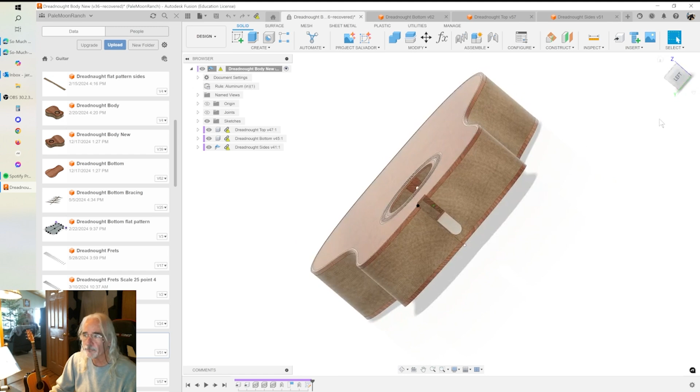One of my subscribers brought to my attention that the top and the bottom of the body on the acoustic guitar, when we use the thicken command to extrude to create a solid body from the surface, didn't extrude in a way to line up with the body. The body is perfectly vertical, but because the top and the bottom are at angles, when the thicken command thickened them, it thickened them at that angle, and the result is this.

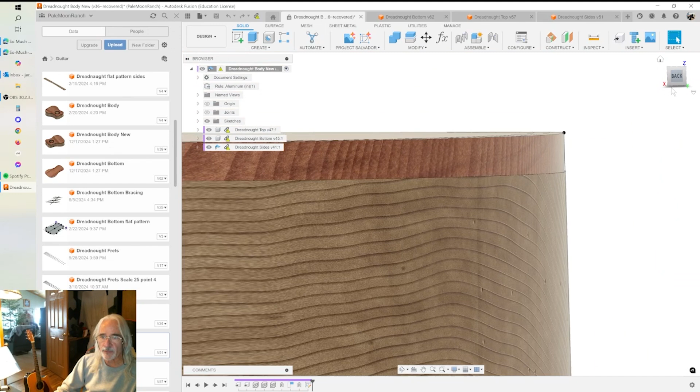I'll zoom in so you can see. I drew a line here. I made a sketch and drew a line to demonstrate. Now this effect is very, very small, but it is there. This is about 15 thousandths of an inch, this gap that you see in here. I'll get even closer, but you can see that it is there.

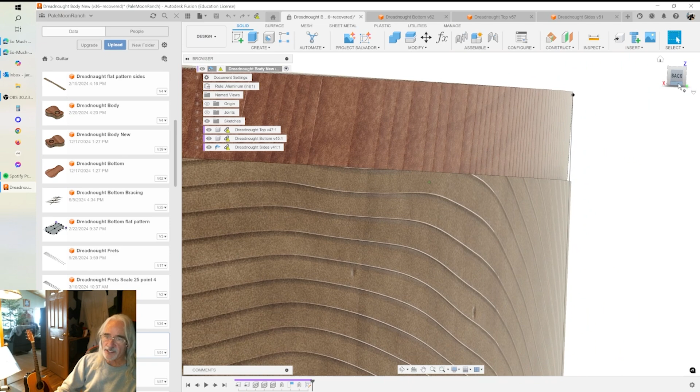In practical terms, would that make a big difference? Probably not. You'd sand that out in about 5 seconds. You're going to be sanding this whole outside anyway, but we're not going to use that as an excuse. We're going to fix this and make it so it fits perfectly.

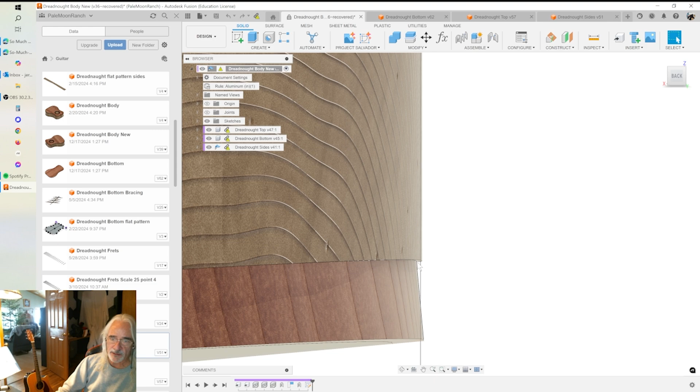It's even more dramatic on the bottom. So let me show you that as well. This is what you get on the bottom. Because the bottom is at a steeper angle, it is extruded at a steeper angle, and you get this kind of goofiness. And this is the top that is 15 thousandths. So with that said, let's go fix it.

It involves having to modify the top and the bottom models, and then adapting the sides to those new tops and bottoms. So we'll get started with the top first.

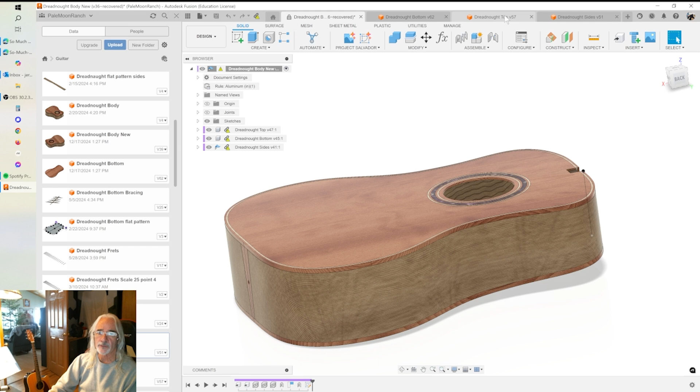So this is going to be an addendum to parts 5, 6, and 7, which are creating the top, the bottom, and the sides and the body. At a later date, I'm going to create new part 5, 6, and 7 videos independently. But for now, this is an addendum that is going to start from where we make the changes in each one of these models, and just cover the new functionality that will fix this issue.

So starting with the top, if we go along our timeline here, down here there's a surface delete face command on the timeline. We are going to start from there.

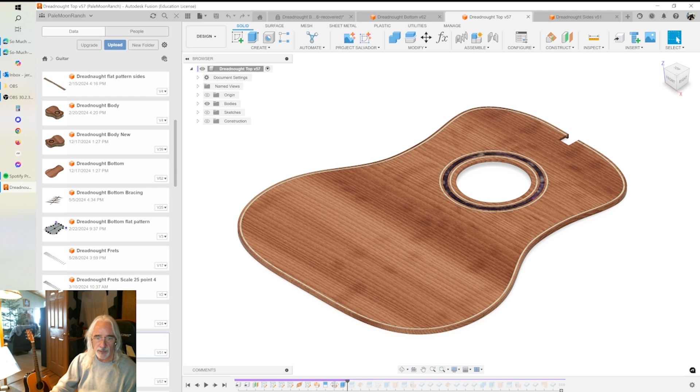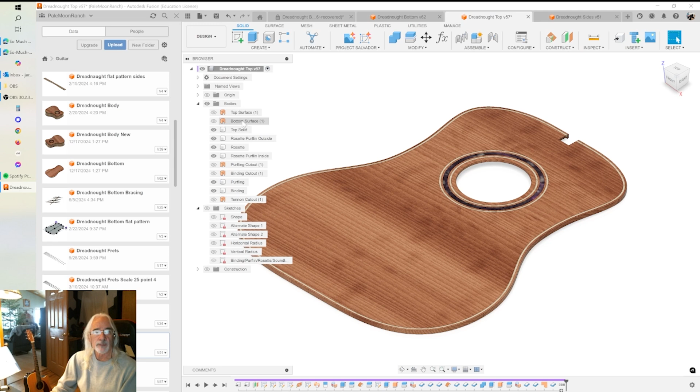As a note, before I do that, let's move the timeline back out here. And I just want to say that while I was in here, I did a few things too. So you're going to see some differences here. I deleted sketch 9, which was an unnecessary file, it didn't serve a purpose. So you'll see that there is no sketch 9, but you'll see all the sketches have been named according to the functionality they provide, as have the bodies. So all of the bodies have an appropriate name for what the body represents.

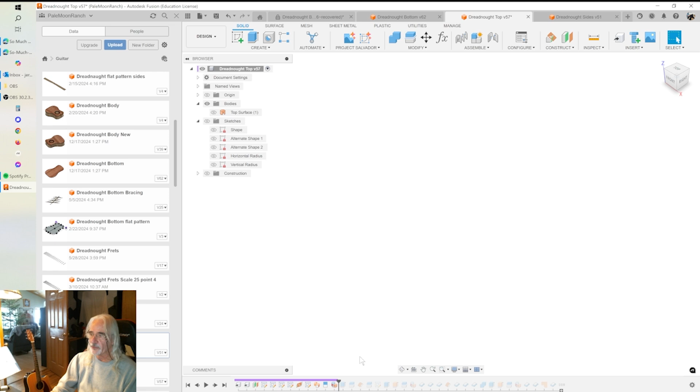So now back to this. First thing that I did was, instead of doing a thicken of the surface body, instead I did an extrude of the shape. So turn off that surface body. I still created the surface body because we're still going to need it to use as a cutting tool, essentially. But instead I did an extrude of the profile from the shapes sketch. I did that in 2 directions, just arbitrarily a half inch in each direction, and created a body to cut from.

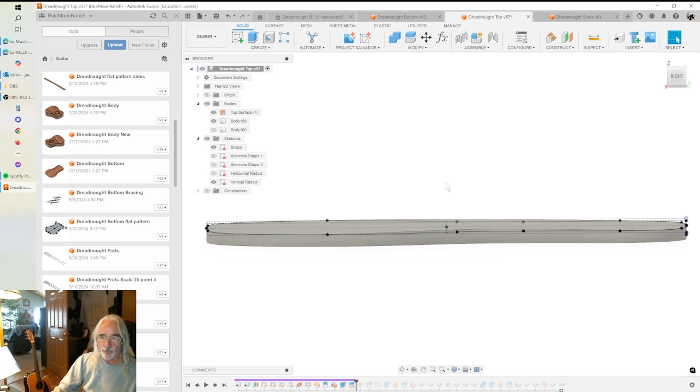So the top is already on a horizontal plane, so it's not as dramatically affected by this as the bottom is, but we're going to redraw it anyway because it is off just a little bit. Because of the radius that we cut into the top, it doesn't end up being a perfectly flat surface.

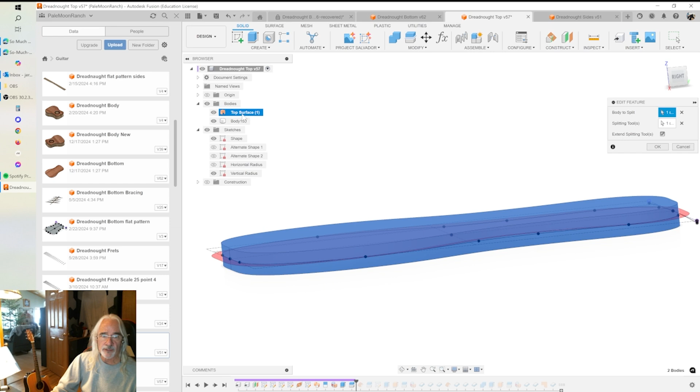So after we extrude this body, then we're going to cut a split body, and our body to split is going to be the extrusion that we created, and the cutting tool will be the top surface that we created with the sweep command.

So once we've cut that, you cut it here, and we'll turn off the body on the top, and then we still have the bottom.

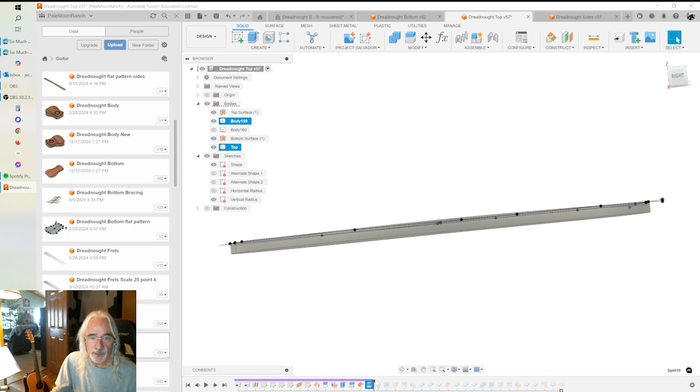So next thing I'm going to do is create an offset from the top surface and create a bottom surface, and then we're going to do a split body on that. And the body to split is going to be the remaining portion of the extrusion, and the splitting tool will be that new bottom surface that we created.

And then when we do that, we can turn off the other part of that body that's left, and what we're left with now is our top.

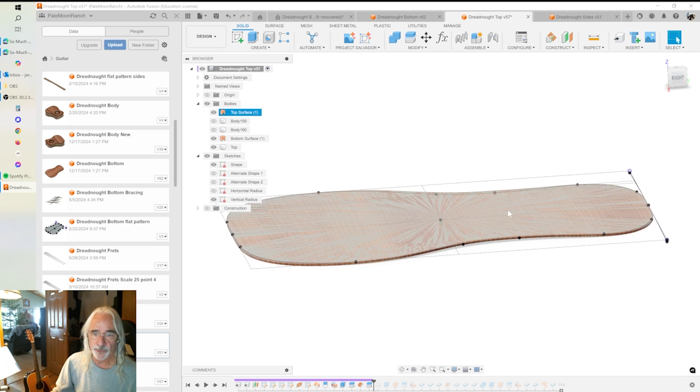So I'm going to turn off these cutting tools for now. We don't need those.

And then I'm going to create a sketch, and I won't go over all of this. This is in the original video of creating all of the drawings for the purflings, the rosette, the sound hole, and the binding.

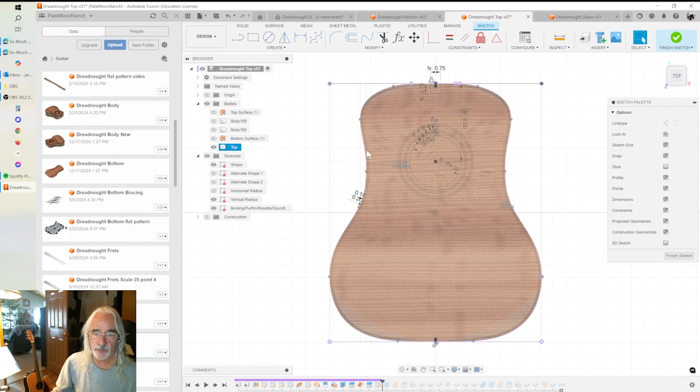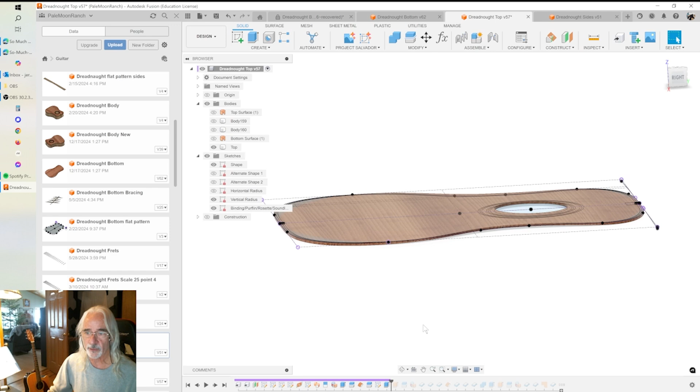Next thing I'm going to do is create the purfling and the binding. Since we didn't do this with surface bodies, it's no longer on that same shape. Now, because we extruded it, these edges are straight up and down. They're no longer at the angle of the radius top. They're just a straight up extrusion from the profile. So these edges are perfectly vertical.

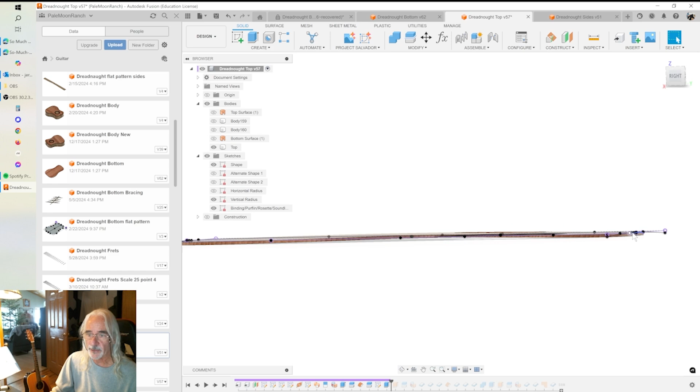So the next thing I do is I created a cut extrusion to cut out the sound hole. And then I created a surface extrusion off of the sketch that we made.

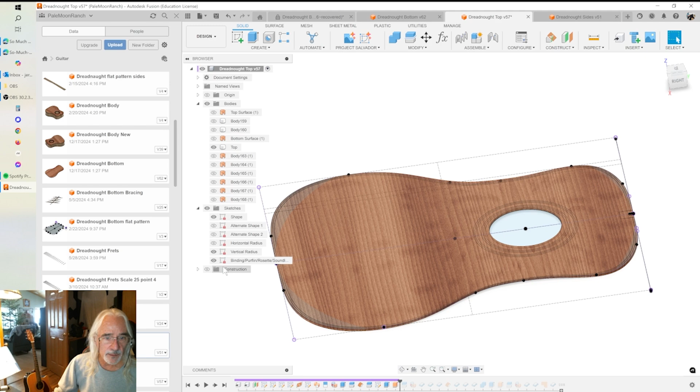Let's turn off these other sketches. We're doing this stuff in here, the purfling and the rosette. So I chose those 6 lines that define the purflin and the rosette, and created surface bodies to use as a cutting tool.

Then I use a split body to cut those, so that now I've created a separate body for each one of those pieces.

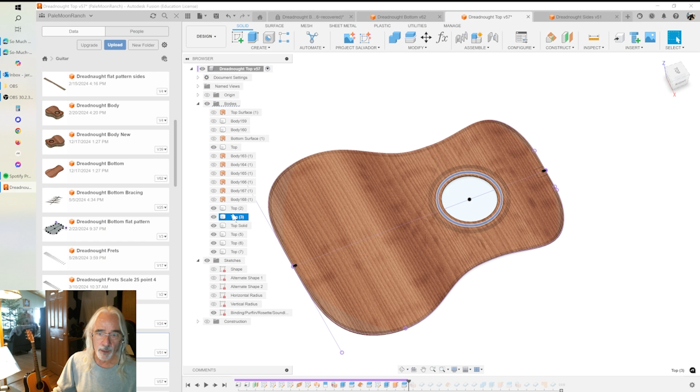Next thing I'm going to do is delete those faces for the rosette and the 2 purflings, and that'll just leave a surface at the bottom of the top. Sounds weird, I suppose.

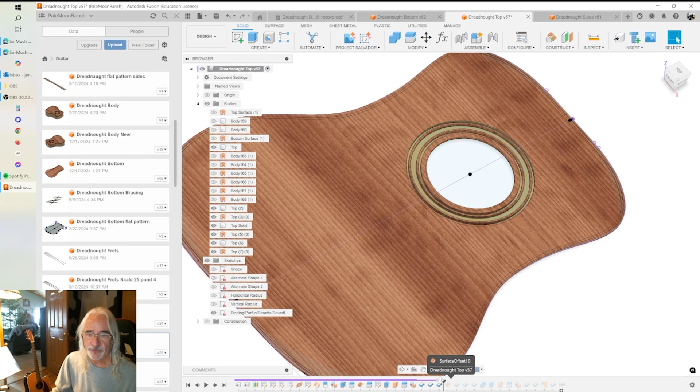Then I'm going to do a thicken on those surfaces to half the thickness of my top. So thickness divided by 2. In this case, it was a minus to get it to extrude in the up position.

Later, I'm going to do a combine to combine those surfaces with the bottom because they are solid, and then that will just leave these holes to which I can now create the purfling and the rosette.

So next, I'm going to create surfaces on top of those bodies. So now I've created surfaces on those bodies.

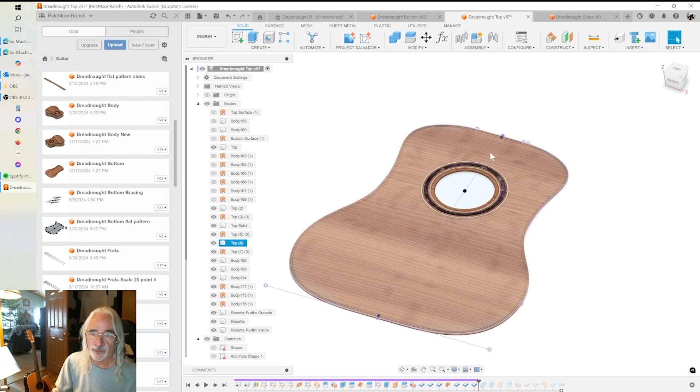1, 2, 3. Let's turn those on. You can see those surfaces, and then I'm going to thicken those surfaces to the top of the top. The wording's getting a little weird here.

Okay, and I've applied appearances to these to show them. But what we now have is 3 bodies there, and then we have 6 bodies underneath.

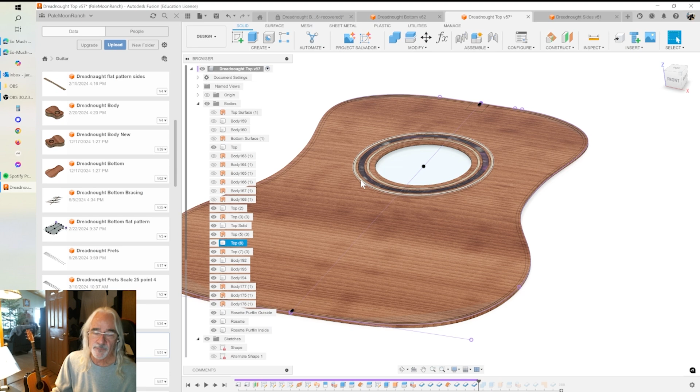So I'm going to take those 6 bodies now, minus these. I'll turn these off, and we're left with this. So I want to combine everything that's here without those purfling into a single body.

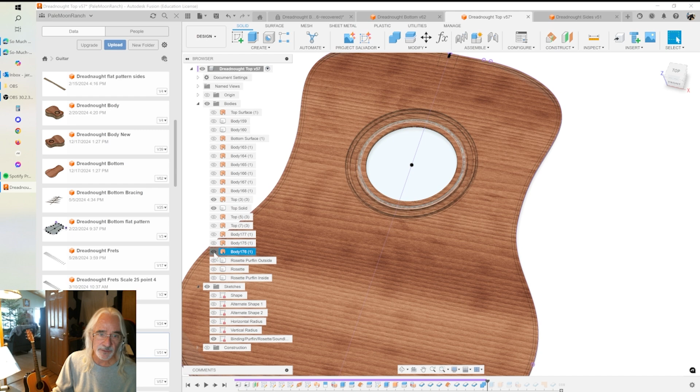So I'm going to do a combine, and that combines all of those. Then I'm going to turn off all of those surfaces and get them out of my sight. And now this is all one solid body, and I can turn back on my rosette and my purflings.

This is all very similar to what we did in the first video, but because of the way we created this with a solid extrude instead of a thicken, they've just changed a bit. So that's why I'm running through all this again.

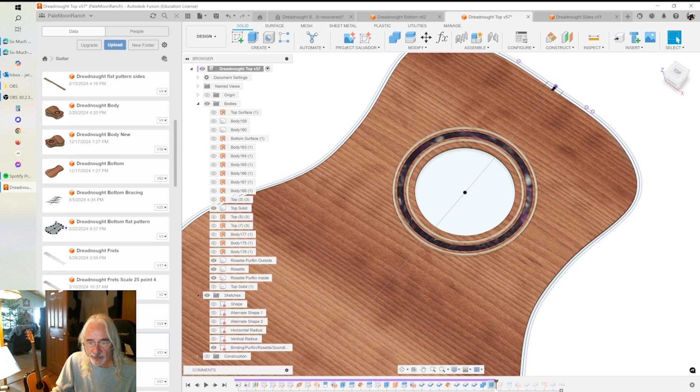So next thing I'm going to do is an extruded cut using my sketch. Let's get my binding sketch. I'm going to turn off the body so you can see what I chose.

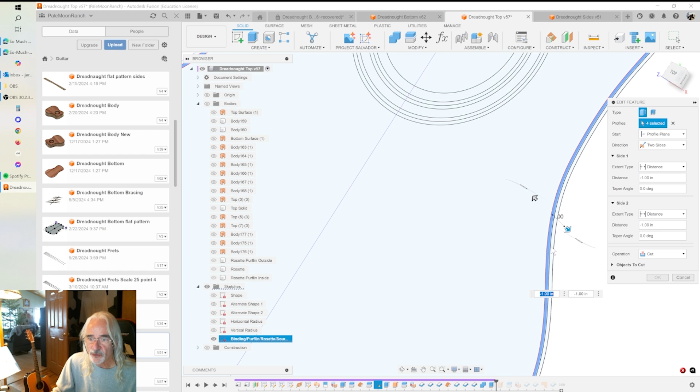So for my cutting tool, I created these. I chose those 2 inside lines from that sketch in order to cut through the body. And so that gave me essentially this.

So what I did was I cut out that strip in between. What I've done is create 2 surface bodies with this surface extrude on the side of the top and the inside of the remaining piece that will become the binding. So hopefully you can see that there's 2 surface bodies on those inside edges.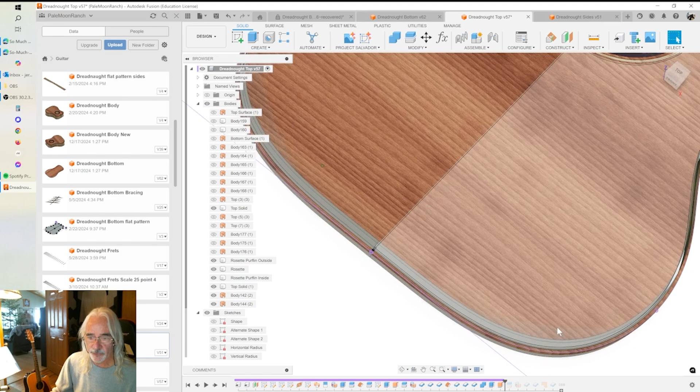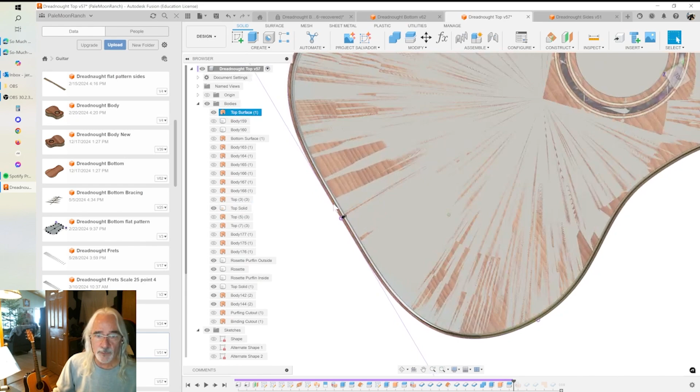So next what I'm going to do is use those to split the top surface. So I'm going to do a split face, and what I did was I split that top surface. Turn off the top solid for a minute so you can see that.

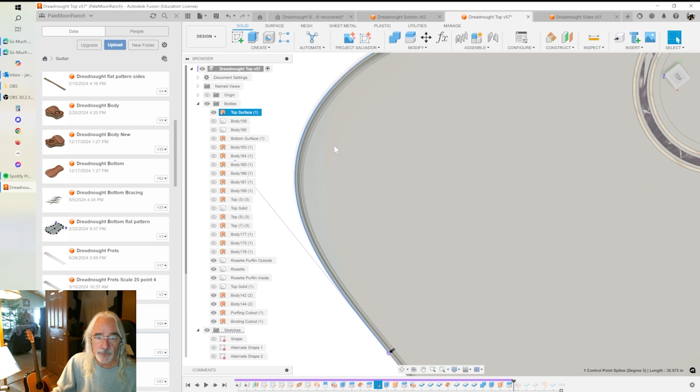So now what I have is 3 surfaces here. There's the one that constitutes the main part of the top, one that constitutes the purfling, and one that constitutes the binding.

Okay, and then I'm going to delete those cutting tools, the ones that were on the inside faces of the top and the binding. So those are gone.

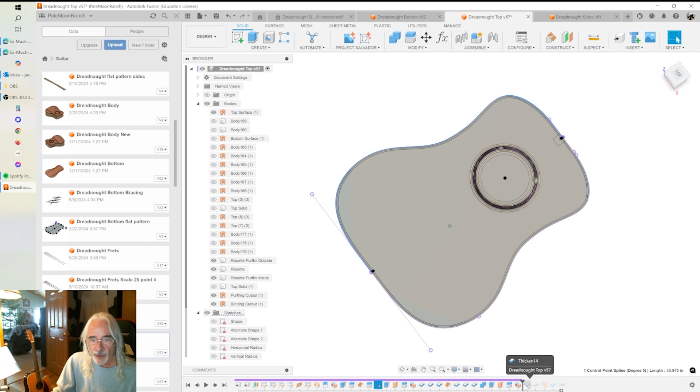And then I'm going to thicken those 2 outside ones. First I'm going to thicken the purfling one, so you can see that I've thickened that to create a purfling, and then I'm going to thicken the outside one to create a binding.

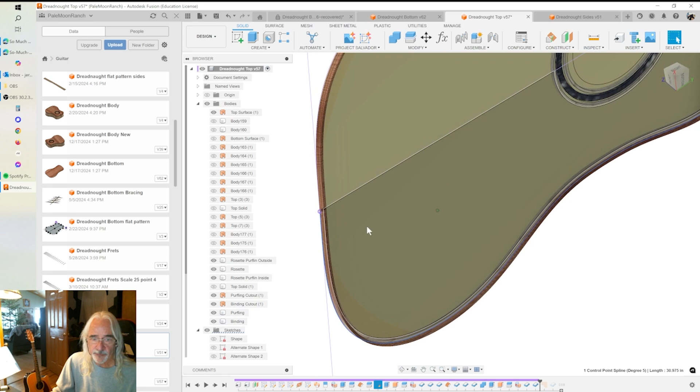The purfling I did to the thickness of my top, and the binding I did to twice the thickness of my top. And that should make sense.

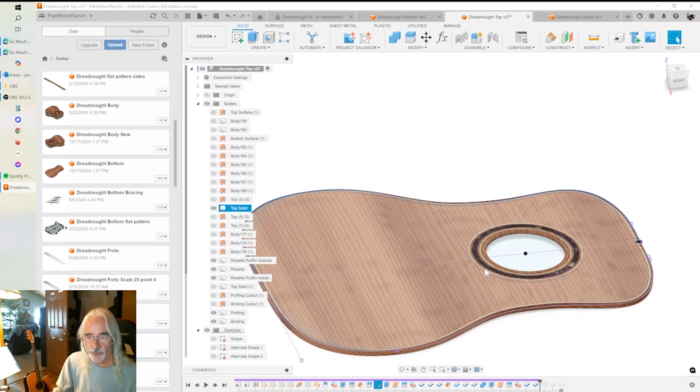So then I'm going to turn off all of those surfaces, and I'm left with - where's my top? There it is. So there's my completed top, except the last thing I have to do is cut out my slot for my tenon from the neck tenon.

So this is exactly the same as it was in the original video. I'm going to create a patch on this sketch.

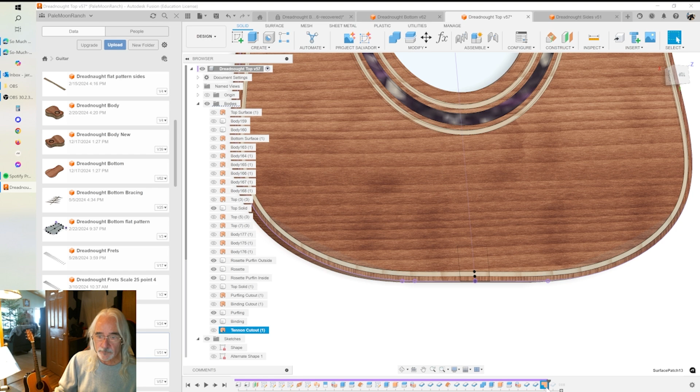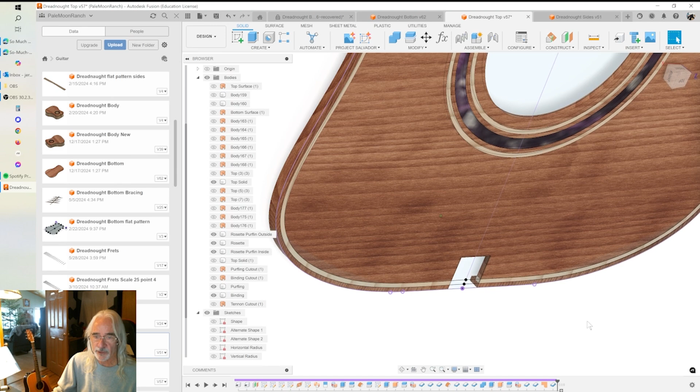So I've created a patch here using that sketch, the binding purfling rosette sound hole sketch. I'm going to use that patch, that surface created from it, to do a thicken cut. I'll use the thicken command as a cut and cut that out. Now we turn off the sketches, and there's our completed top.

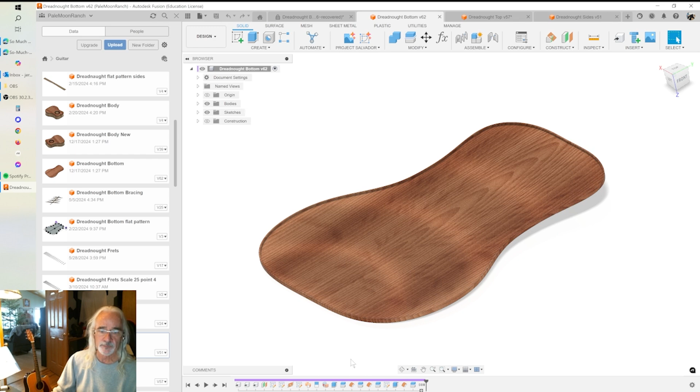So again, we're going to start in the same place where we deleted those excess pieces around the edge of the radius bottom, and just like before, we're going to do an extrude.

Let me back up and notate here again. I did some naming and cleaning up over here. One thing I did was sketch 7 up here was redundant—we already brought in the shape sketch from the top through a derive down here. For whatever reason I projected that onto a new sketch originally, and that was unnecessary. I already had it here; I didn't need to project it.

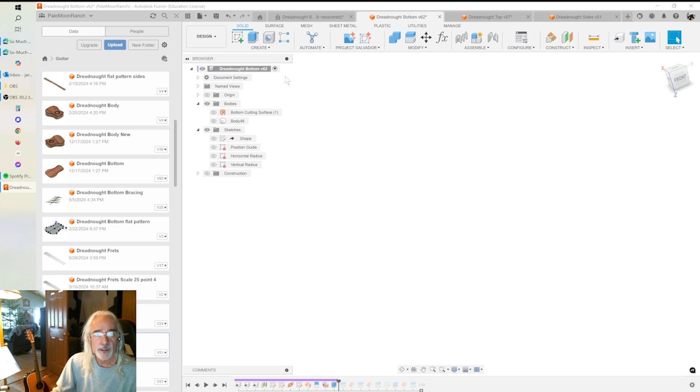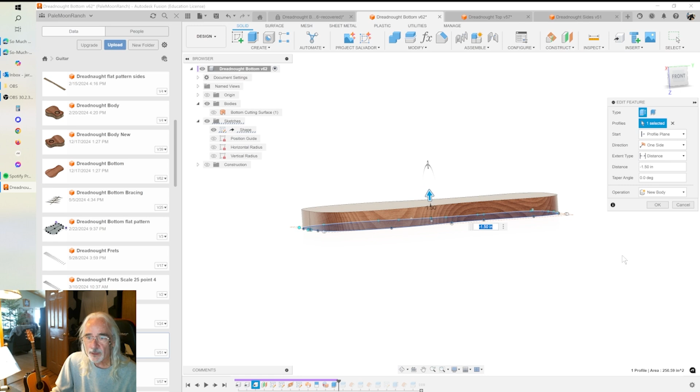I'm only using that in order to extrude this body. So I'm using that shape, that profile, to extrude it and create this body. And if we take a look at that, I just extruded in both directions, and it's in half—never mind, I only extruded in one direction.

That's all I needed to do on this one. So I extruded that up 1.5 inches, and then I did a split body using the bottom cutting tool, the bottom cutting surface, which we created with the sweep command.

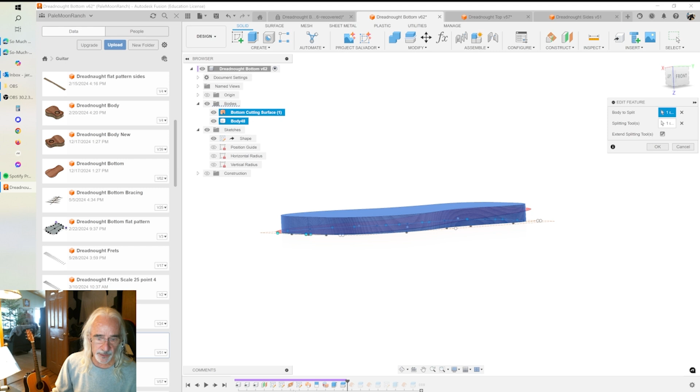So that is the surface we created when we swept the radius surface. I'm going to use that to cut, and then delete that body. So it cut this body in two. I'm going to hide the bottom one—I still have the top one. I'm going to cut that.

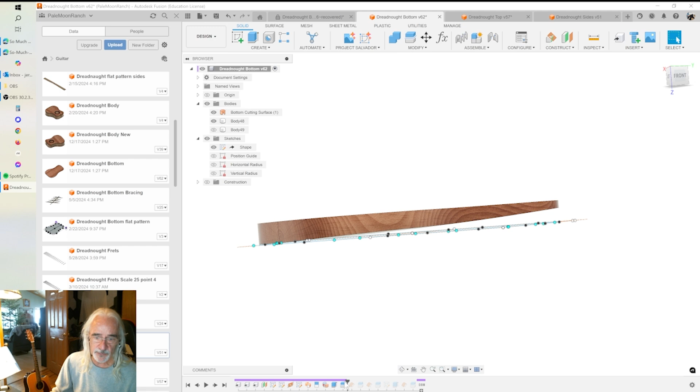So the next thing I'm going to do is create an offset from the bottom cutting surface to create a middle cutting surface, and that'll make sense in a minute. Then I'm going to use that to split, turn off that part, and now I have my radius solid bottom.

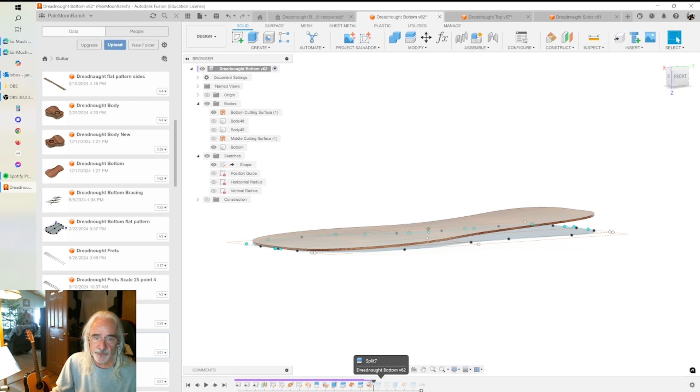So then the next thing I'm going to do is create another offset to create my top cutting surface—I'm sorry, first I'm going to create my binding cutting surface. What I'm doing here is creating an offset from the outside edge of my body.

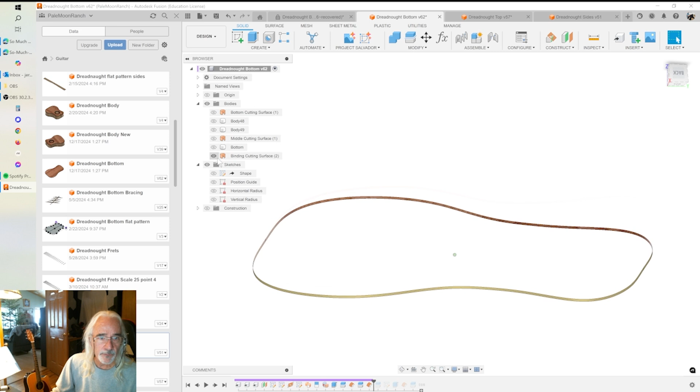So let's turn off that bottom cutting surface and turn on our bottom, and then I'm going to create an offset from this outside edge. I'll get it open here, and I'm going to take that in 1/10 of an inch, the width of my binding. And so now I have that, which I'm calling my binding cutting surface.

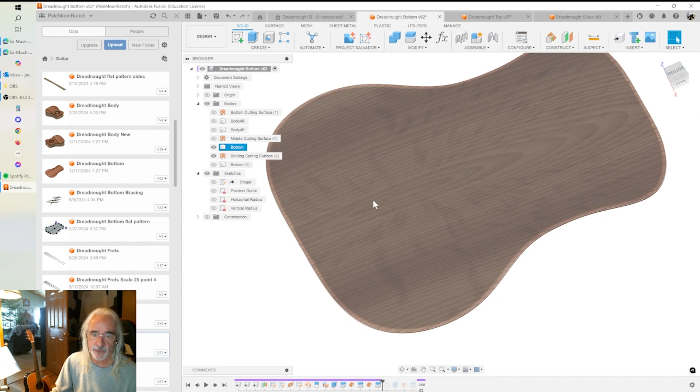So I'm going to do a split body using that tool, and that'll cut away this outside edge so now I'll create a binding in that space instead. I'll turn off that cutting tool, get back to my bottom, and the piece I cut away is that right there.

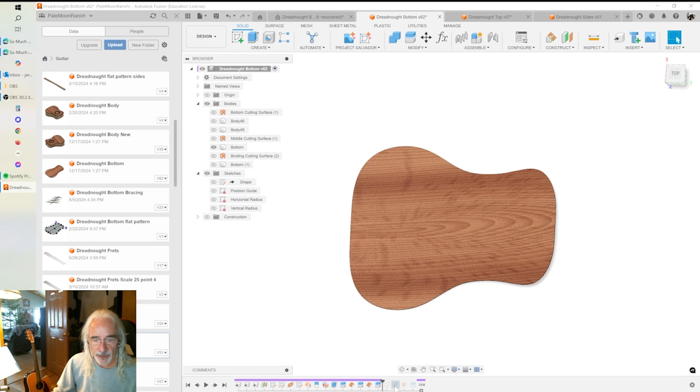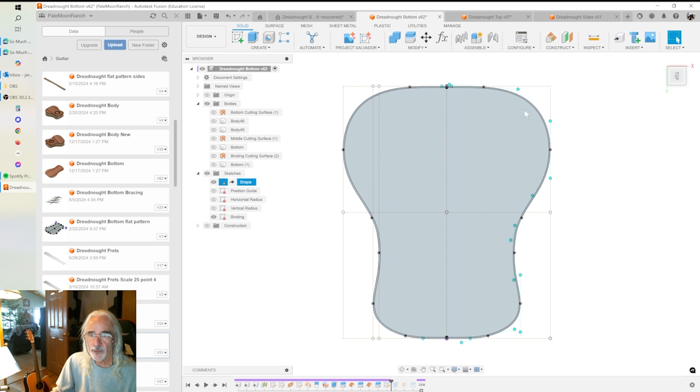So that's gone, and now I'm going to create a sketch for my binding, which is just an offset from the dreadnought shape from the shape sketch. I projected that in and then did an offset inside for 1/10 of an inch, which gives me this profile that I can extrude to make my binding.

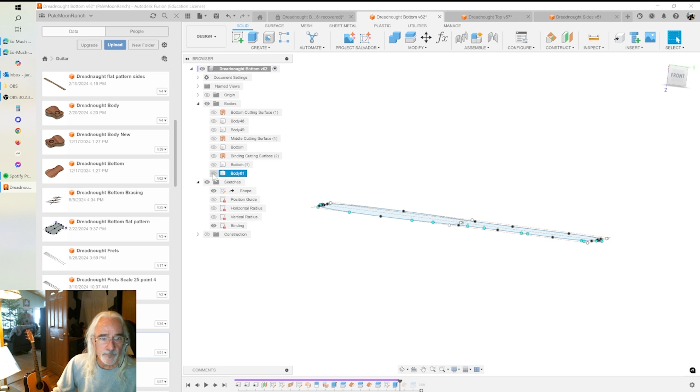So I'm going to do a solid extrude—that's the wrong one, here, yeah. I did a solid extrude again for 1.5 inches up, and now, just like I cut the top, I'm going to cut the binding in the same way.

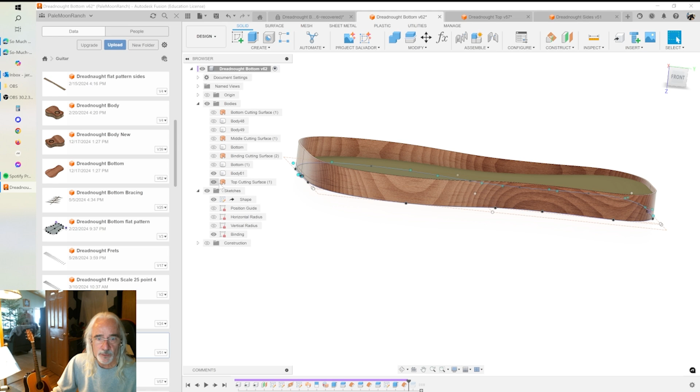So now I'm going to do an offset to create my top cutting surface—so that's this one, and that's twice the thickness because my binding is twice as thick as my top. And I'll have my bottom cutting surface down here, so on the bottom and on the top.

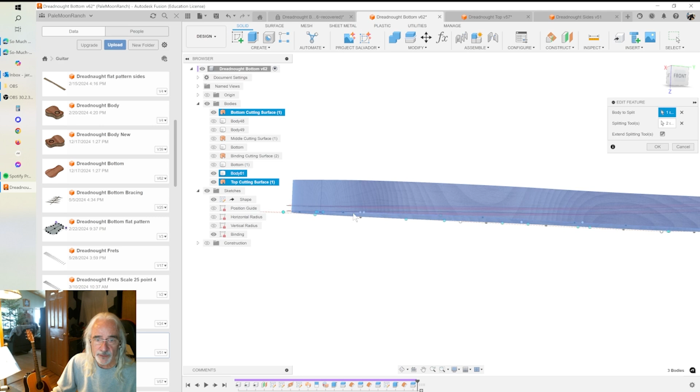And then we're going to do a split body command, which will use both of those surfaces to cut the binding. Then we'll turn off those excess bodies, and we're left with—and turn off the cutting tools—and so there's our binding.

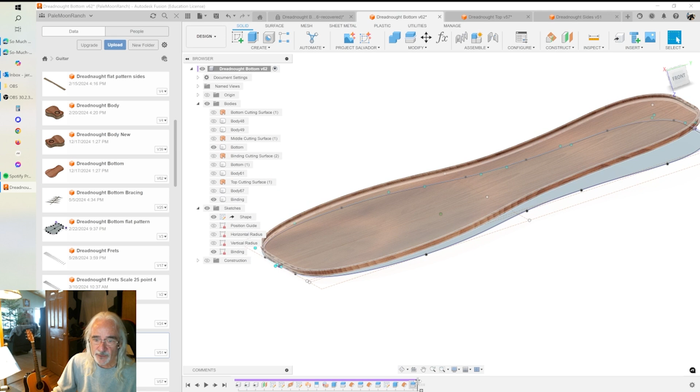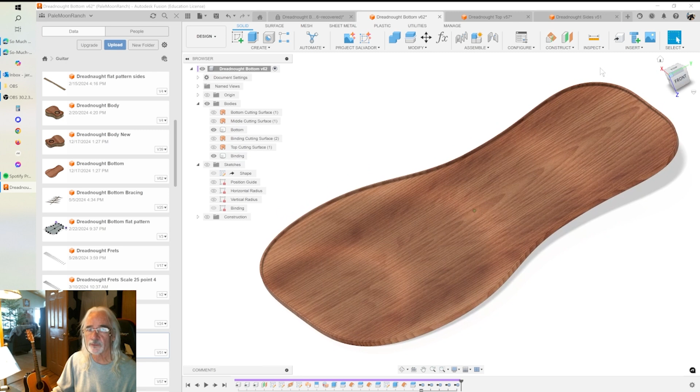Then we can go turn back on our bottom, and that's our completed bottom. The last thing I did here, which I didn't mention in the top video either, is this last little group—I went through and did a remove command on any bodies that were just extraneous so they weren't in the model. And that's the bottom, so let's move on to the sides now.

For the sides, we only have a couple things we need to do. Since I was already in here, I went ahead and did something I didn't do in the original video, and that is named all of my bodies and named all of my sketches.

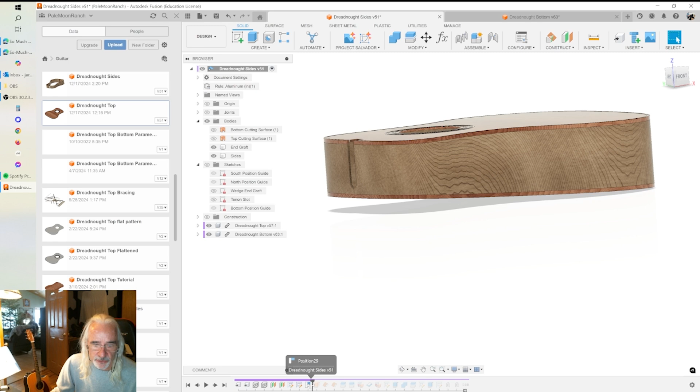The main thing in here is that we'll need to realign things because we changed everything. These will no longer be in the same position they were. So what you need to do is back the timeline up to before the extrude and before that position command, and then position these the same way that we did before.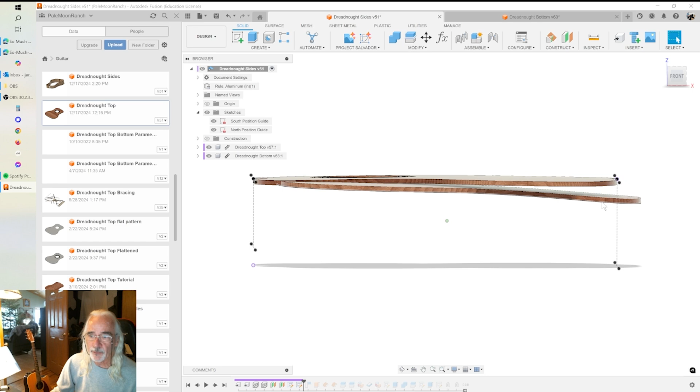So we need to turn on the two sketches for our position guides. The top one is already going to come in. If not, you'll have to position it, but it should already come in lined up with those two points on each end, the north and south position points. And then for the bottom, at least on mine, it comes in upside down.

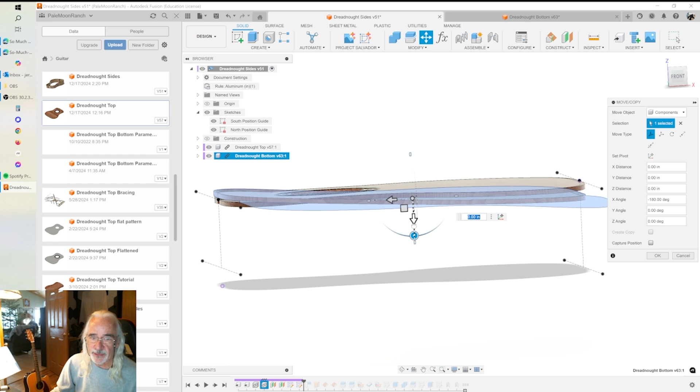So I'm going to do a move. I'm going to choose components, select the bottom, and rotate it 180 degrees to get it right side up. And I'm going to drag it down and do a point-to-point move, selecting the bottom point here on the bottom edge of it, and line that up with the point on the position guide.

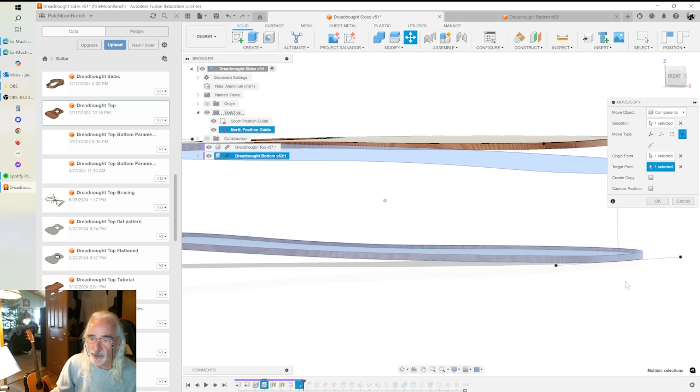Both sides should line up automatically because we set it up that way. When we drew the bottom, we made sure we created it at this angle already, and these position guides here show that it is lined up properly.

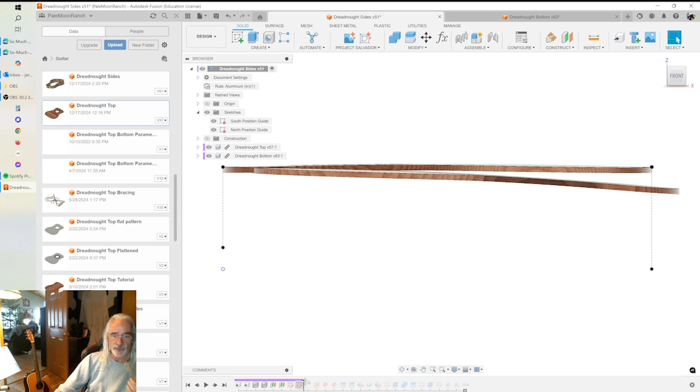Once that's done, you need to step back through the timeline. Actually, after you've done that, you'll want to do a new capture. So if you had a capture on your timeline, delete it, and then once you've positioned those, you're going to capture that position up here on your timeline.

When you do that move command, you'll have a... let me just back up and show that. So I'm going to go through the whole move thing again. We'll get the move command, do a free move, select components.

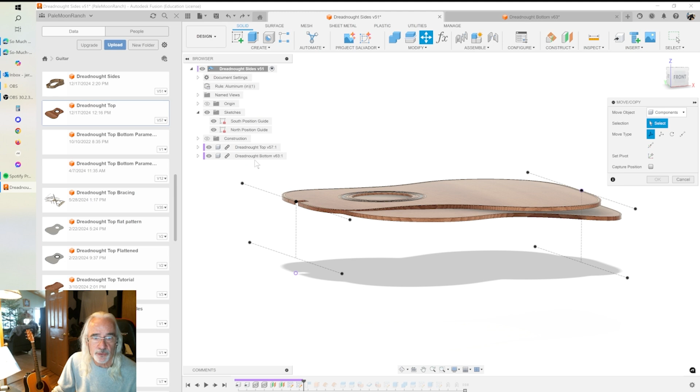We're going to choose the dreadnought bottom, rotate it 180 degrees to get it right side up. Oops, what am I doing here? I'm going to drag it down below.

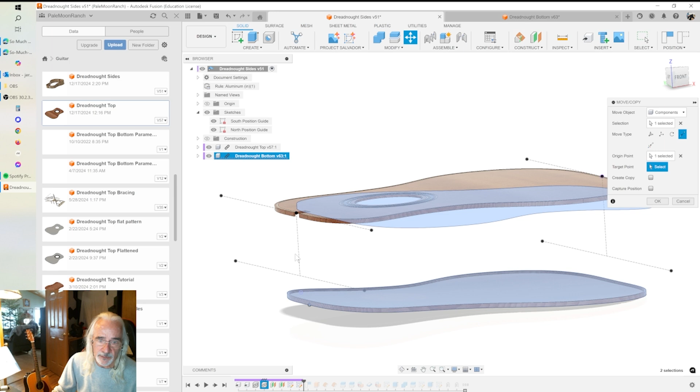Then I'm going to go to a point-to-point move and move that bottom point on the end to there. And if I rotate this around to make sure everything is lined up right, this vertical line should be right on the center, and it should be lined up with the bottom, and that looks good.

I click OK. Now I have a capture position icon up here on my menu. I want to choose that and capture my position.

After that, we're just going to step through each of these. You have to back the timeline up so that it recalculates this, and step through them.

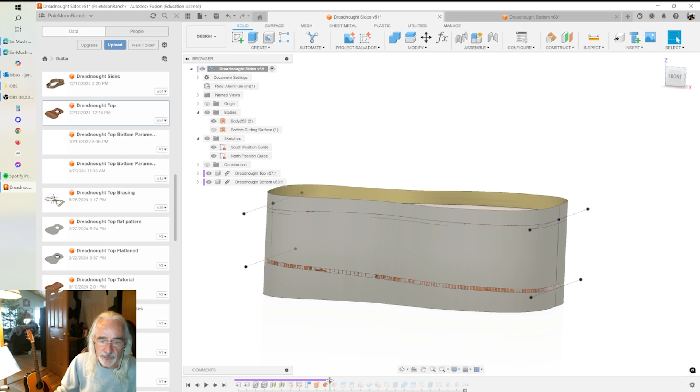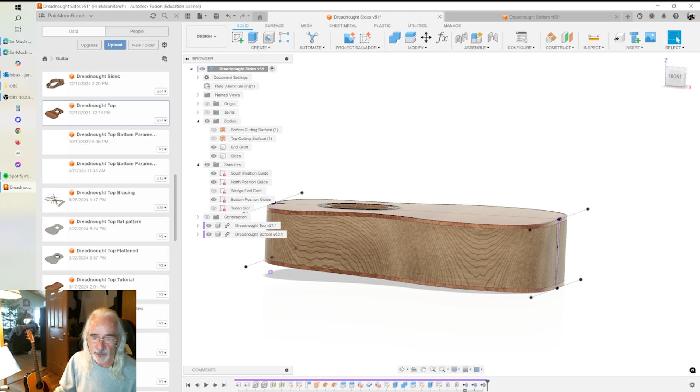Nothing needs to change from the original model. We're just going to step down through to the end. And here again, I added a little group at the end that deletes any extraneous bodies up here, so they're not cluttering up my browser tree. And I put them in a group so I can minimize them.

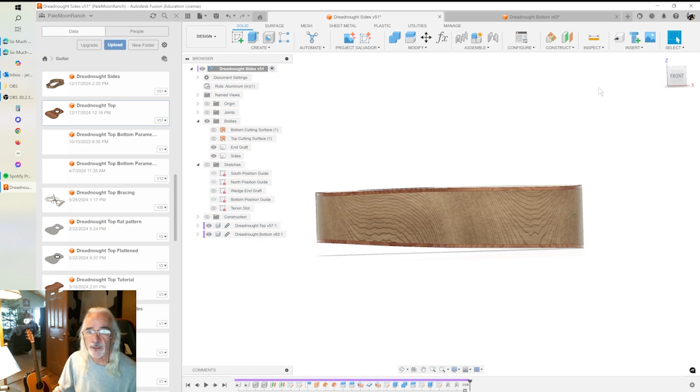But now, if we look at this, let's turn off those sketches, zoom in here, look at the front, and we have a perfectly straight line up and down here now. So that should take care of the problem.

As for the body component, it's really kind of extraneous. We've already created the body here in sides. So if you want to do a body, you're basically just going to go do the same thing. Here, I'll just go ahead and bring it up - dreadnought body.

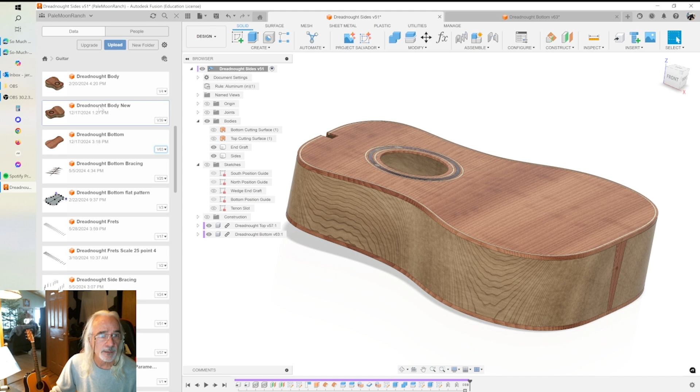And so there's really nothing on the thing. You're just going to reposition the top and the bottom and do a capture position.

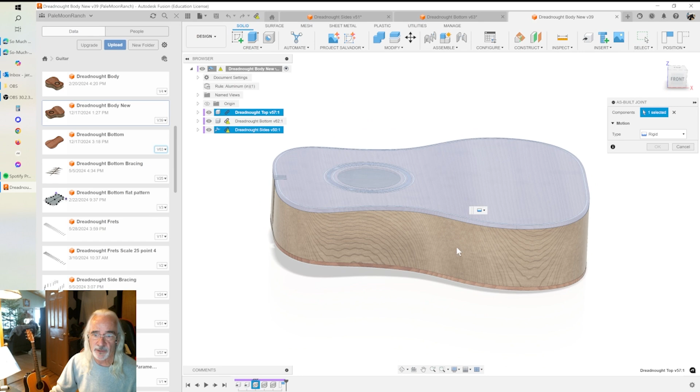And then it probably makes sense to go ahead in here and do as-built joints. So grab an as-built joint, grab the top, grab the side, say OK, do another as-built joint, grab the bottom and grab the sides, and say OK. And now they're locked in place and they can't move independently.

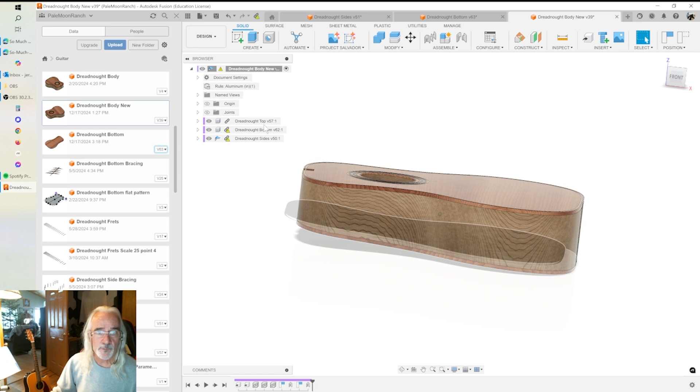And that's kind of it, I think. So I will do new videos for the top and the bottom and the sides at some point in the future, but hopefully this addendum will help get you where you want to be.